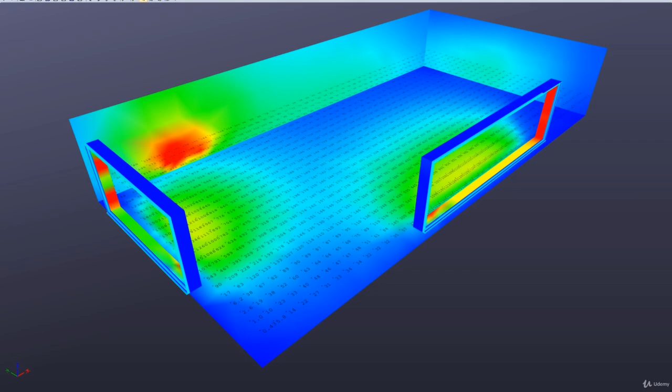Building occupants who can visually connect with the outdoor environments while performing everyday tasks experience greater satisfaction, attentiveness, and productivity. For the daylight portion of this credit, compliance is based on actual daylight measurements, the easiest and best method for determining the level of daylight in an existing building. For the views, compliance is based on the quality of the views from inside the building. Let's have a look at the requirements.

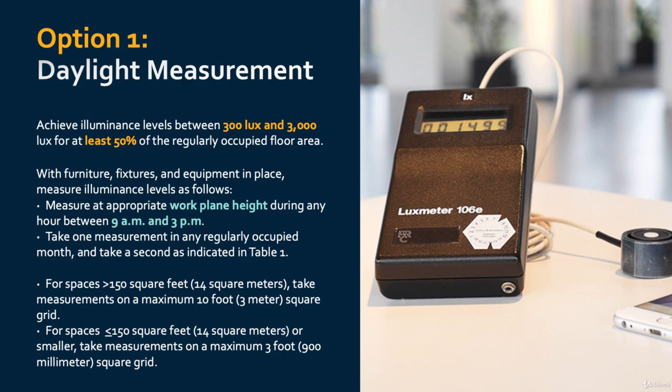Measure at the appropriate working plane height during any hour between 9 AM and 3 PM. Take one measurement in any regularly occupied month and take a second one as explained later. For spaces larger than 150 square feet, take measurements on a maximum 10-foot square grid. For spaces 150 square feet or smaller, take measurements on a maximum 3-foot square grid.

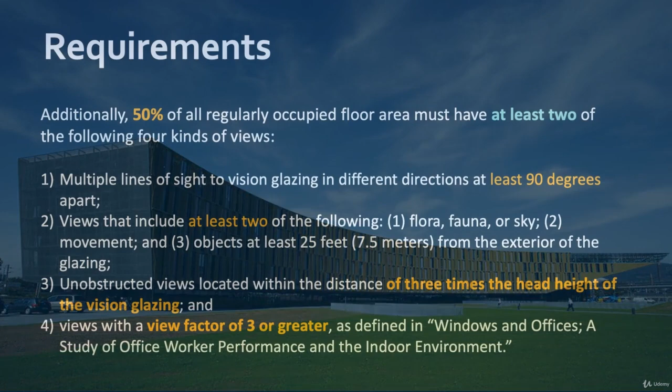Achieve a direct line of sight to the outdoors via vision glazing for 50% of all regularly occupied floor area. View glazing in the contributing area must provide a clear image of the exterior, not obstructed by frits, fibers, patterned glazing, or added tints that distort the color balance. Additionally, 50% of all regularly occupied floor area must have at least 2 of the following 4 kinds of views. Multiple lines of sight to vision glazing in different directions at least 90 degrees apart.

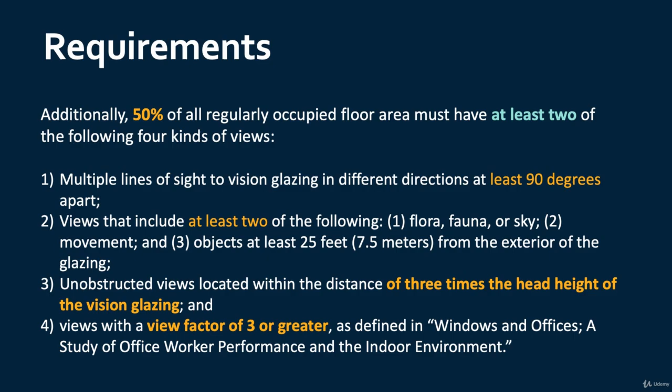A view that includes at least 2 of the following: 1, flora, fauna, or sky; 2, movement; and 3, objects at least 25 feet or 7.5 meters from the exterior of the glazing. Unobstructed views located within a distance of 3 times the head height of the vision glazing, and views with a view factor of 3 or greater. On the next slide, you can see here how we define the view factor.

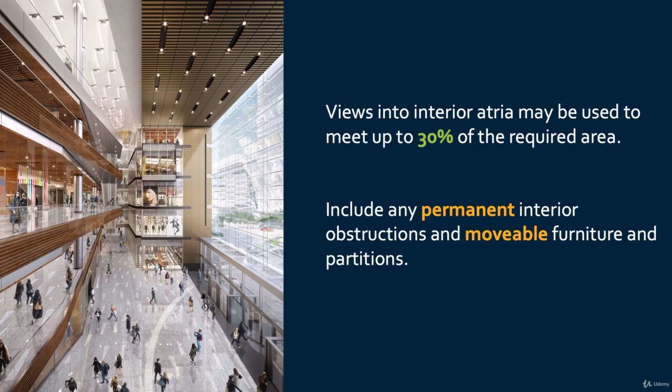Include in the calculation any permanent interior obstructions; movable furniture and partitions may be excluded. And views into atria may be used to meet up to 30% of the required area. Now for warehouses and distribution centers only: for the office portion of the building, meet the requirements as we mentioned before. And then for the bulk storage, sorting and distribution portion of the building, meet the requirement above for 25% of the regularly occupied floor area. There are no performance criteria.

In terms of the documentation, pretty straightforward. For all options, provide a list of all regularly occupied spaces with the total area and qualifying floor area in each space. Now, depending on the options you take, you either provide a sample daylight measurements report and the calculations demonstrating the compliant space within 300 to 3000 lux.

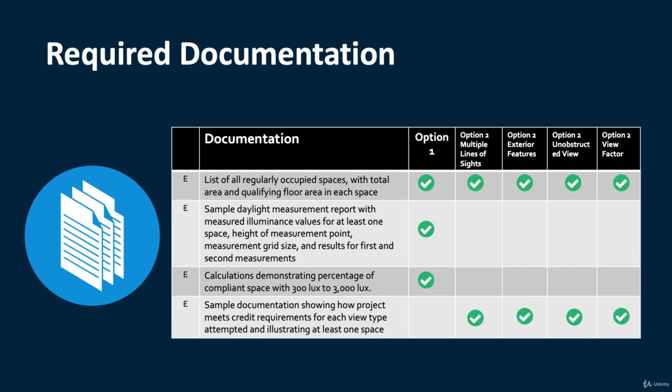And if you go for option number 2, with the view type, provide sample documentation showing how the project meets the credit requirement for each of the view types attempted and illustrate at least one space. Exemplary performance is available if you achieve both options for 75% of all regularly occupied floor area.